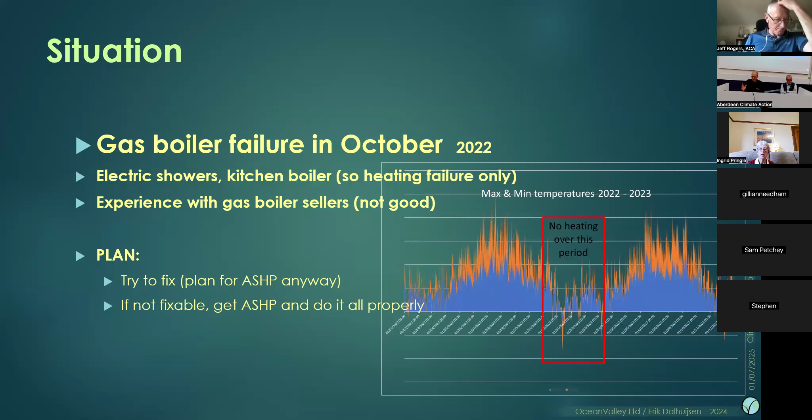So what I had was a cold house, 1960s, poorly built, no insulation other than underfloor and loft insulation. And there's double glazing all around. The house is spread over 3 levels, which is kind of important because that basically means that you get the heat buoyancy. So it disappears from the ground floor where the living room and the kitchen are, and it goes to other places where very little is needed.

I couldn't get cavity wall for various reasons that the council will be able to explain to you much better than I can, because I tried hard enough. But there's draft between, as you'll hear later on, there's air coming up between the plasterboard and the walls, as is the case in most houses built like this. So that wouldn't have made a big difference.

And the other thing I have is an open fireplace. And I use that a lot for Bush TV, for my mental health, as we used to call it. There's something to stare at when you calm down. But open fires are really wasteful. They burn a lot of wood. They don't give you very little heat. And when they're off, they're really cold. And it's really quite difficult to seal off the huge draft they get.

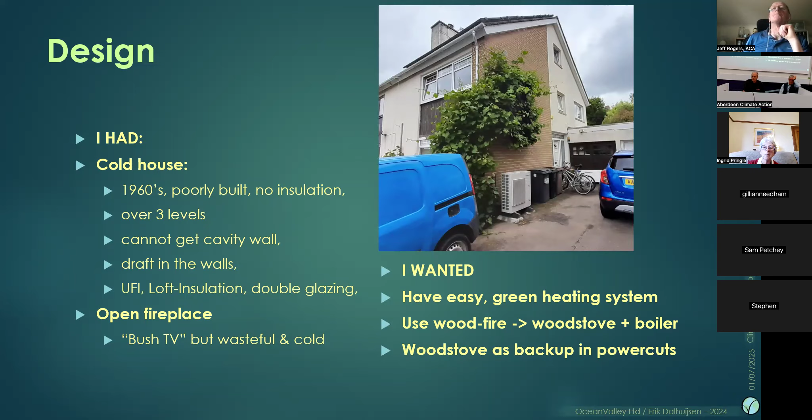So what I wanted is an easy green heating system. And I wanted to be able to use the wood fire for heating. And that meant I needed to go for a wood stove with a back boiler. And this was part of the reason I ended up designing it myself - I also wanted the wood stove as a backup in case of power cuts. So that system in itself had to be power free.

Basically, a heating system is like this. You have a bunch of heat inputs and you have some heat outputs. And the heat inputs are typically either a gas stove or a gas boiler or an air source heat pump, or in this case, the wood stove. And then on the outputs, you have 2 outputs. Basically, one of them is domestic hot water, the showers, bath, and kitchen. And the other one is either radiators or underfloor heating, in the case of a water-based system, which is most common.

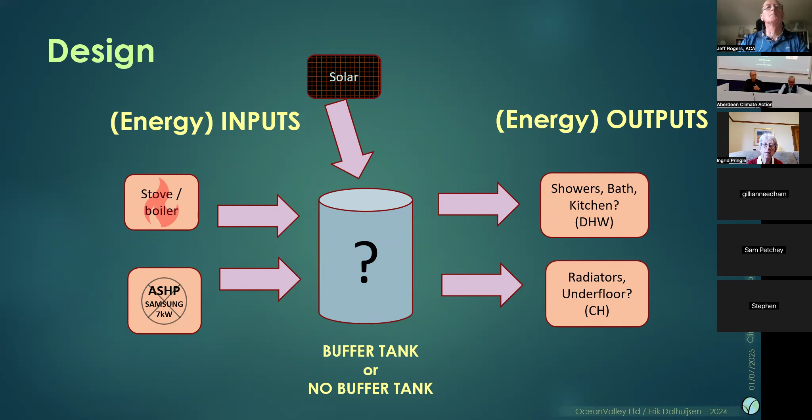In the middle, you can either have a direct pipe connection between your gas boiler, for instance, and the central heating, or you can have buffer tanks. That's a whole separate conversation, which can easily fill 15 or 20 minutes. And then I had solar on the roof already, and if you get that energy, you might as well tie it in.

Now, what determines the design is this: the temperatures of what goes in. A stove or a gas boiler comes in at between 60 and 95 degrees. An air source heat pump comes in at between 30 and 50 degrees. What you want to take out, for hot water, is about 60 degrees. That's the barrier you need to get over to get rid of Legionella infections, so you don't have to achieve that constantly, but you need to be able to reach it.

And of course, for radiators and underfloor heating, you only need 25 to 50 degrees, and 50 is already on the high side if you want to keep it cheap. And then again, the buffer tank comes in. Now, at this point, if you have these different temperature ranges, some kind of storage tank becomes quite relevant, because you can't mix the high temperature with the low temperature heat pump.

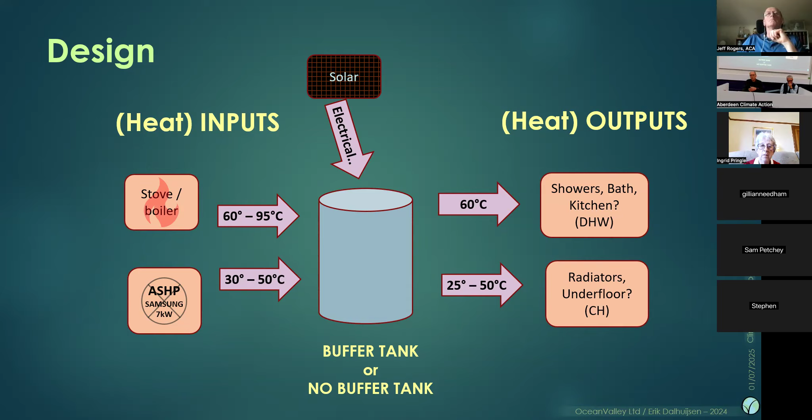Now, the actual design, I won't go into the detail, but maybe in the Q&A we'll come into that, looks a little bit like this. Each yellow box is kind of a collection of valves and sensors in order to control the thing. And then, of course, you have a computer in the air source heat pump, which runs it all. So just imagine the first picture — that's much easier to understand.

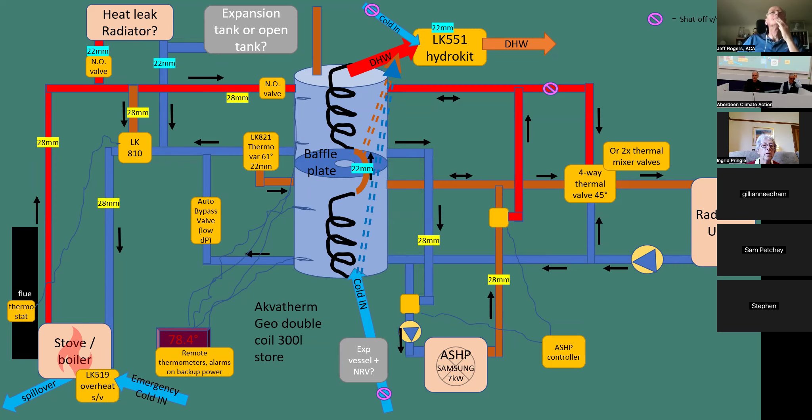So my first approach was the commercial route, have someone install it, because I had an understanding of what heat pumps do, but that doesn't necessarily mean you know what's involved in getting them to work. In the whole Northeast, I found 2 installers who were potentially able to do it, and within 6 to 12 months. Now, of course, this was before the winter, so that meant next summer, which wasn't that attractive, but was still an option.

They didn't want to build in a wood stove system. They didn't want to build in any other connection. One of them had their preferred choice of air source heat pump, and one of them was prepared to do a redesign for a different type, but at additional cost.

Effectively, I got one quote of £13,000, which excluded any changes to the heating system, which I thought was quite high because the heat pump itself is only £2,000, that order of magnitude. And from that quote, it's pretty much plug it in and put a boiler in place. Now, I'm simplifying it a little bit, but we'll see what it comes out to.

Now, the boiler stove, the chimney liner — I tried to get someone to help me with that, and I couldn't find anybody, any stove installer, who was prepared to do anything that was kind of complex and involved design work. And I did get one quote for actually demolishing the chimney breast, because I needed to move a small wood fire and I needed a big alcove for the wood burner. They gave me a £5,000 quote for increasing the size of that hole.

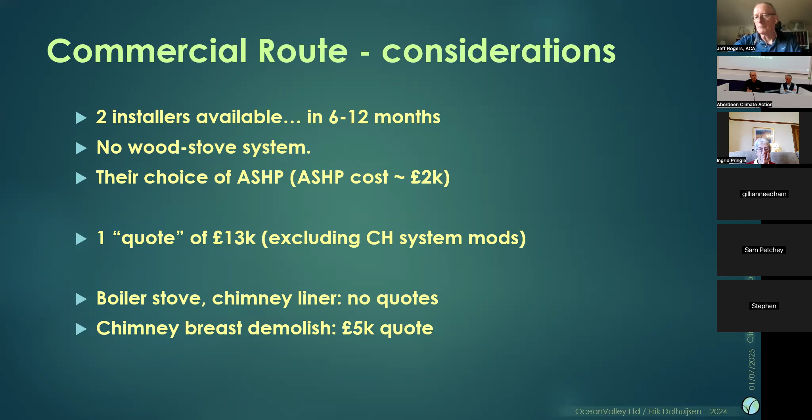Now, I knew a builder who I asked about this, and he said, I bet you we can do that in less than a day. And we, in fact, did. So I saved myself a lot of money — I didn't really have that to spend on something trivial like that. But it did reinforce my idea that not all the professionals are on your side necessarily, to put it mildly.

Okay, so what are the considerations for doing a DIY? One of the downsides is that you can't get a government grant — you need an MCS installation in order to get that. So you have to make sure that you make it cheaper than the government grant you're going to get. That's not English, but you understand what I mean.

You also have to be really careful that you don't forsake the warranties that come with the equipment, specifically with the heat pump. And that's one of the reasons why in the design I had to stick exactly to the specifications of the manufacturer. If you're an MCS installer, then you can design and change the pipe diameters a little bit depending on the installation.

In my case, I had no comeback to the installers, so I had to deal with the heat pump manufacturer directly. The first thing they'll say, and I know this because I've been on that side of things (not for heat pumps, but other machinery), is: okay, this is what the installation manual says, what did you do? As soon as there's any difference, they say, oh yeah, sorry. So that meant additional work.

An uncertainty about doing it myself was I wasn't sure if I was going to come across any building regulations I hadn't anticipated, which would either invalidate the whole installation or give me some other problem in the future. I can do all the technical stuff, but I don't know very much about building regulations, at least I didn't at that time.

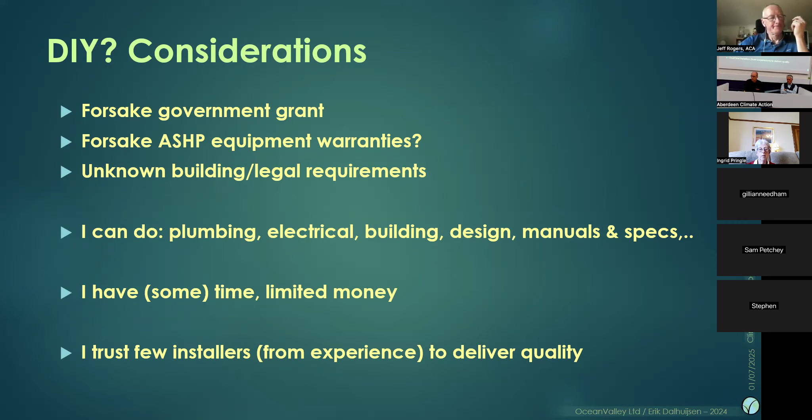My experience with installers delivering quality or understanding what they were doing was pretty limited. In fact, I'd met quite a few who didn't know what they were doing.

I won't go into too much detail, but I ordered the water tank for the central bit, and that turned out to be a really expensive part of the installation, much to my surprise. Part of that was because of the specification I needed, and there's a very limited number available. This one in particular is quite common, but it has to come from Finland, which takes a bit of effort. It's also quite big, had to go in through the window, so it's an extra £1,000 to get a company in to lift it up high and stick it horizontally through a window.

I ordered the heat pump. I went for Samsung because at that time it was the quietest one, and my installation would be on the drive, which is open to the neighbor's front door and a side window of the neighbor's living room. So that for me was kind of important.

The wood stove and the boiler I ordered together with chimney liners and all sorts of other stuff from a great company who actually know their stuff, and who helped me out screening my designs for the boiler and stove safety. I got a pretty good offer because I got an end-of-line high efficiency wood burner.

And then I ordered a bunch of large diameter copper pipes, because you need lots of them.

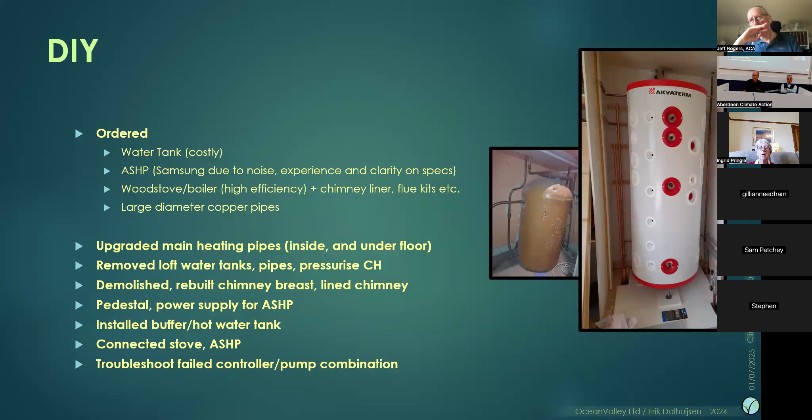You see the big cylinder in the middle, that's with about half the pipe work that goes into it. I made sure that I had enough space to actually be able to connect it up afterwards, because obviously it's new to me.

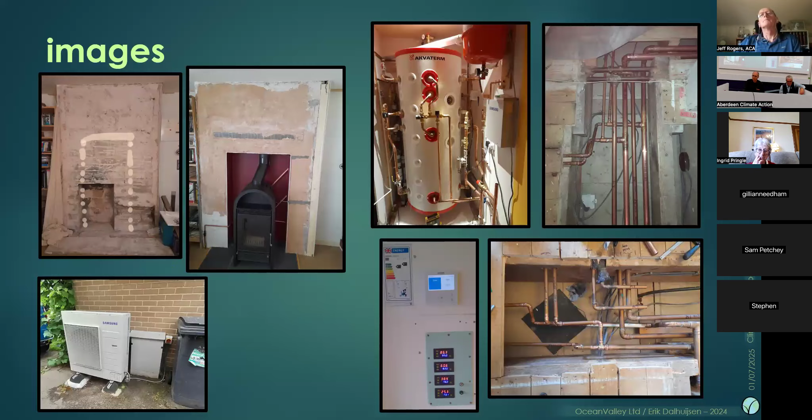So the costs: the stove itself is about £5,000 altogether, including the chimney upgrade. The water tank with the equipment that goes with it was just under £5,000 - just over half of that is the actual tank. The heat pump itself plus the controller was just under £3,000.

The plumbing - pumps, control valves, safety systems and all sorts of things - was another £3,000. Then I upgraded 4 radiators for just over £1,000, plus another £1,000 of building material. So the whole thing, excluding my labor, came to £18,000. But if you don't have the stove and therefore don't need this type of tank, you take £10,000 off that, and you'd end up with roughly £8,000 - though you don't need a lot of the safety system, so it ends up substantially cheaper.

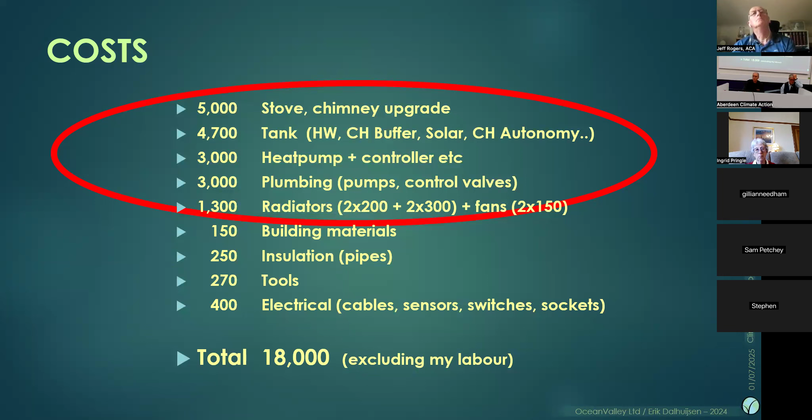Some of the challenges - I won't touch on all of them - but design challenges, one of the biggest was that the specifications of the equipment aren't in enough detail for an outsider to understand. There's a lot of assumptions that builders and installers have, based on using standard setups for standard situations. But you really need to find out which valve can take flow from both directions or only one, and which ones hold pressure and to what pressure, and when they release it. All of those things are really important for both the safety systems and the efficiency of your heat pump, because you don't want water accidentally circulating somewhere it doesn't help you.

The other important thing in the design stage was understanding how I will use this new installation, because it's different from what I had. Over the winter I spent so much time in a really cold house that anything would have been better than what I had then. Working out how you'd prefer to use the installation in the summer and the winter was quite complex.

On the installation itself, one of the things that cost me a lot of time was routing all these pipes to make it understandable. Because if you just connect the pipes the way they're on the drawing and come back a day later, you can't understand how it works anymore. I wanted to be able to walk up to it and, as long as you understand what the system is supposed to do, follow it. That takes a lot more effort than I thought.

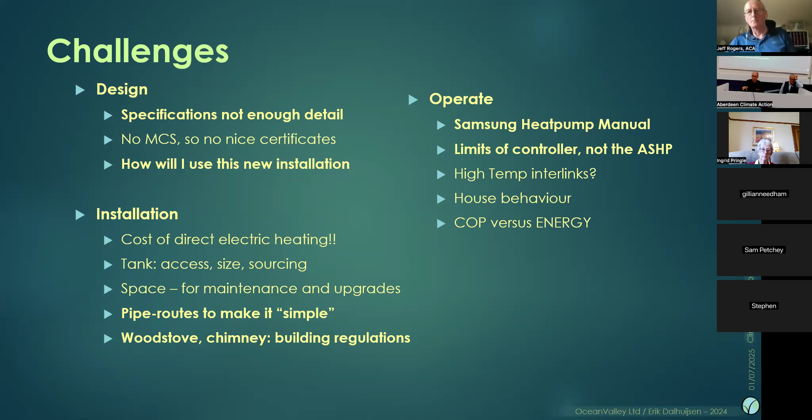So how's it doing? My energy cost is exactly what it was before. If you look at this graph at the bottom right - because I have an Ecotricity tariff and didn't have individual monitoring at the time, it kind of averages over time - it was an average of £200 a month on gas and electrics. Then it went up to about £500 per month when I was using direct electric heating over the winter when it was really very cold and horrible.

And that didn't get the house warm, just to be clear on that. Then it went back down to slightly less than £200 a month with the heat pump, and the house is much more comfortable than it was. It's a much more pleasant temperature, it's controllable, it's understandable, and of course the emissions of my heating system went down to zero.

The resilience is much improved because now if anything fails, I've still got a wood stove that can actually run the rest of the central heating system too. And that is separately battery operated - not permanently, but as a backup.

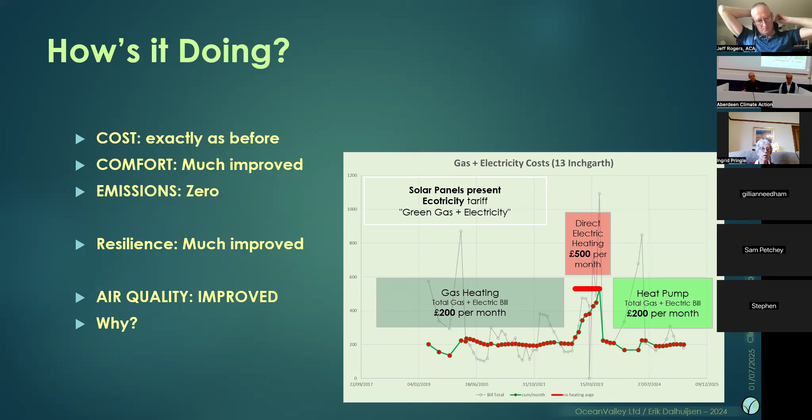And the air quality in the house improved quite a lot, and I think that has very little to do with the heat pump. But what it did have to do with is the monitoring. Because once I installed the heat pump, I wanted to fine-tune it to find out what it was doing and what I needed. So I installed a number of temperature and humidity monitors throughout the house - in the living room, the lounge, one upstairs in my son's bedroom, my bedroom, and then on the top floor to see how much heat was being lost through the room and roof.

Relatively inexpensive with data loggers, and that means you can see over the course of a week what your temperature range is, and then work out what you did and why that is a range to have, and use that to adjust the system. That made a big difference.

Monitoring the buffer tank temperatures - what you see on the bottom right, those are sensors which I installed in the buffer tank. It's a stratified water tank, as you can see very clearly now. Looking at that, I got an idea of how the temperature changed when I had my showers, and I thought that's really a large amount of heat that I lose in the shower. So I replaced the shower head with a low water shower head, which is actually more comfortable, and that made a massive difference on the heat loss.

So again, the monitoring made me aware of that. And of course, I have power use monitoring for all the things, but that, you have to sit down seriously and take time to get all your data on the table, and I don't always have time for that.

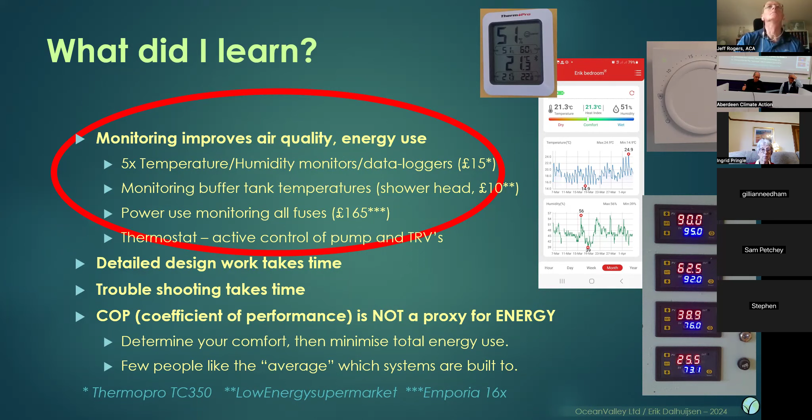I'm over time, so I'm going to skip the rest of the points and just stick to the end: heat pumps work. That should be obvious for most people coming here, that's very clear. They're cost break-even when a house is not yet insulated, as mine isn't. So basically, yes, you can install a heat pump at any time. I would say keep it small, which I did specifically, because once you insulate, you need a small heat pump rather than a big one.

And for me, the wood stove helped me cover - I've had 3 days in the last 2 years that I needed the stove to get the living room up to temperature, which I don't think is bad going for cold winters.

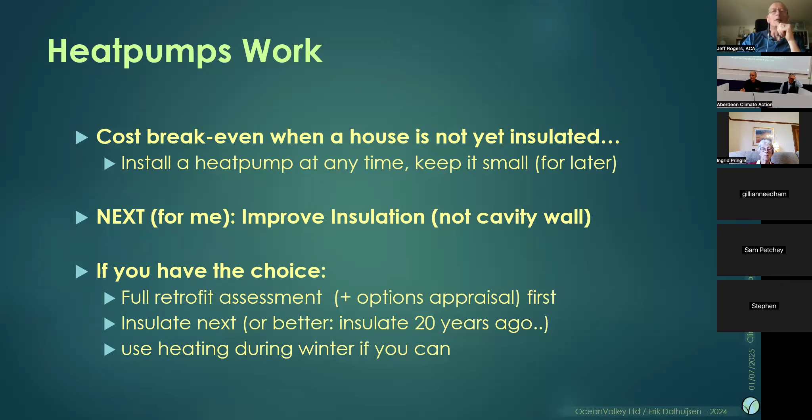Now, for me, the next step is to improve the insulation. But if you have the choice, it's always better to start off with a full retrofit assessment that will give you an idea of what the house state is in and what you can do with it, and then probably to insulate. I'd also suggest using heating in the winter, because without heating, it's pretty cold. On that note, I'd like to leave it. Thank you.